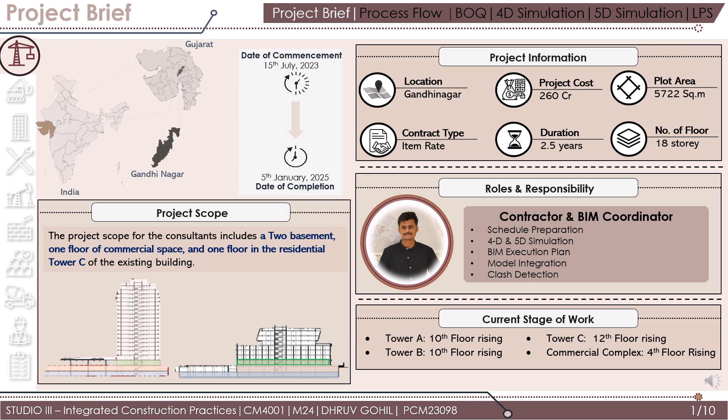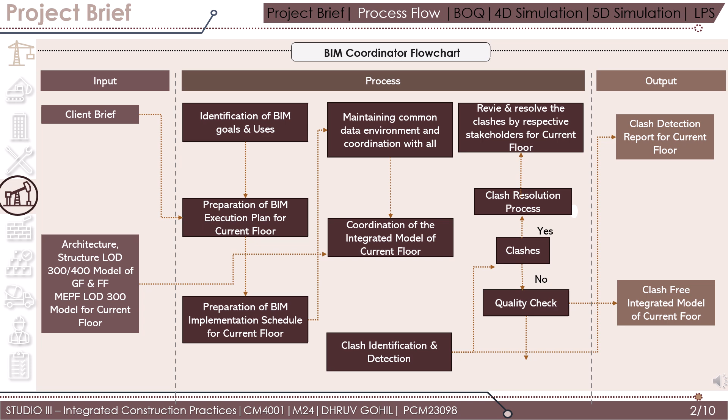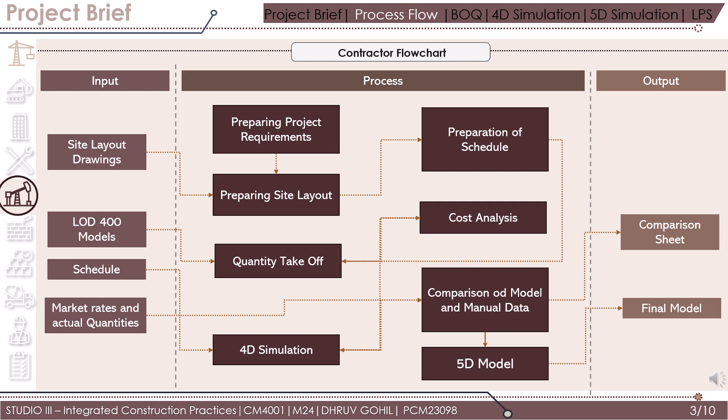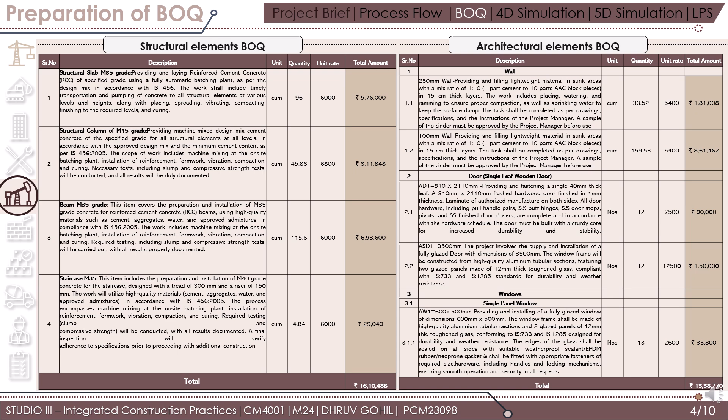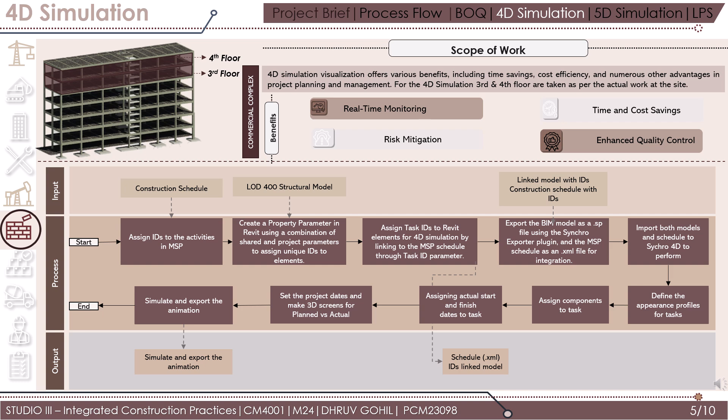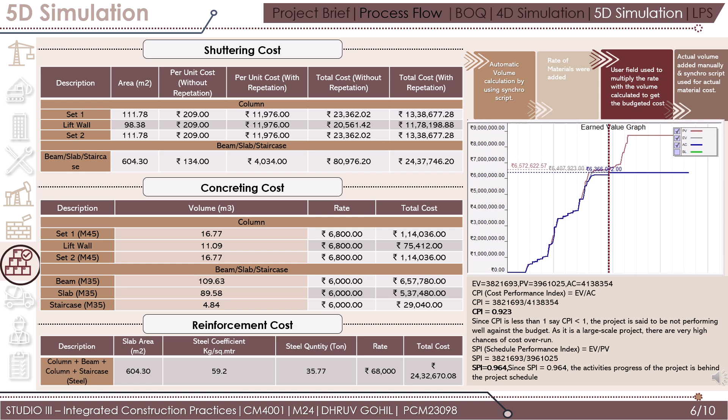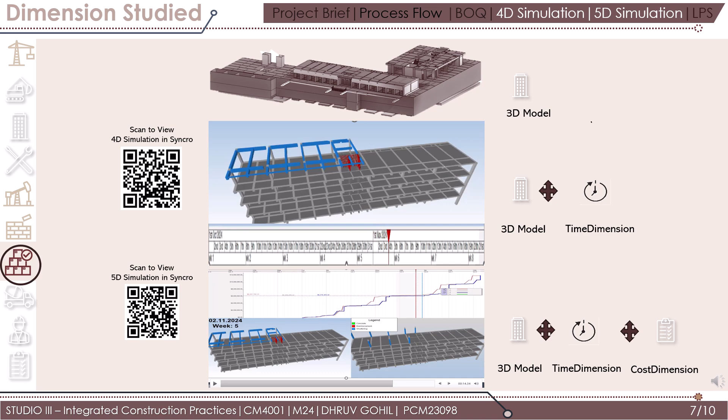For this 3D model, this section shows a 3D model of the building, providing a visual representation of the structure. In the 4D simulation, a QR code is provided to scan a 4D simulation view in Synchro, a software tool for 4D simulation. For 5D simulation, also a QR code is provided to scan the earned value management graph with time dimension, cost dimension, and also the 3D model.

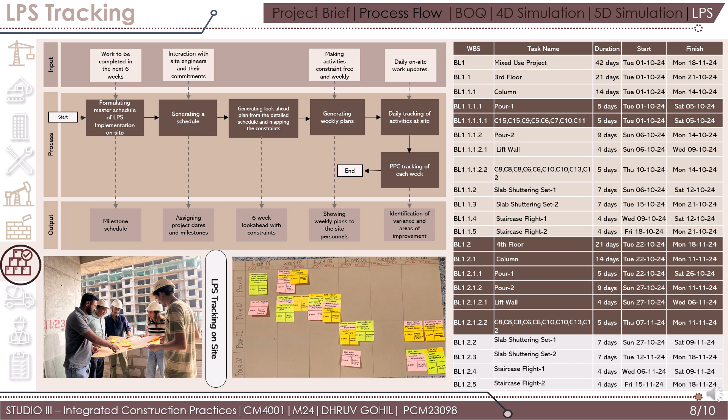In the 6-week look-ahead, this indicates that the focus is on short-term planning and scheduling, looking ahead 6 weeks at a time. So this is a different LPS tracking on site.

However, the delay occurred due to unforeseen issues such as the coarse aggregate supply strike, labor shortage, and the incomplete status of predecessor activities. After that, LPS tracking is shown for the second week.

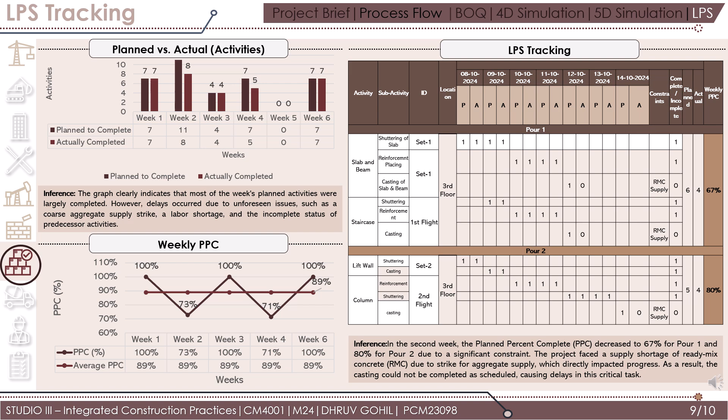In the second week, the Planned Percent Complete PPC decreased to 67% for pour 1 and 80% for pour 2 due to significant constraints. The project faced a supply shortage of ready-mix concrete due to a strike for aggregate, which directly impacted progress. As a result, the casting could not be completed as scheduled, causing delay in the critical task.

Lastly, we conclude that BOQ preparation provides a comprehensive itemized list of material and cost essential for project completion, providing a detailed basis for accurate budgeting and efficient resource management. For construction LPS, a 6-week look-ahead plan was established with ongoing tracking, revealing constraints that required activity replanning at the site. PPC and variance reasons were identified.

For cost estimation, Revit quantity takeoff streamlined component listing, offering quick, accurate, and easily extractable material quantities, unlike labor-intensive manual takeoff from 2D drawings, as Revit automates much of the process through 3D modeling. 4D simulation enables visualization of the construction sequence, comparing planned versus actual progress to identify and mitigate delays, potentially reducing cycle times.

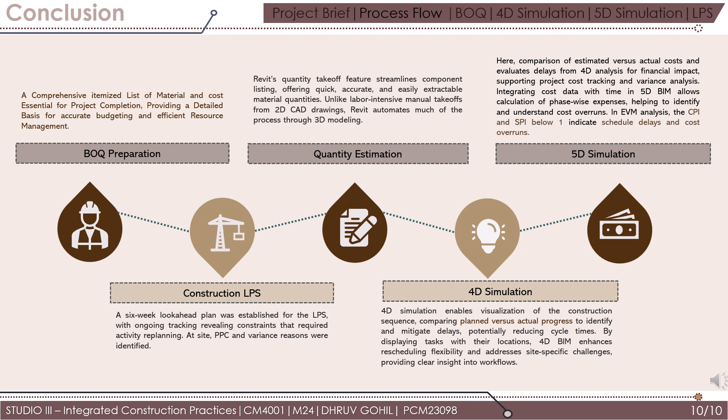In 5D simulation, comparison of estimated versus actual cost evaluates the financial impact of delays from the 4D analysis, supporting project cost tracking and variance analysis. Integrating the cost data with the 5D BIM allows calculation of phase-wise expenses, helping to identify cost overruns. In EVM analysis, CPI and SPI below 1 indicate schedule delays and cost overruns.